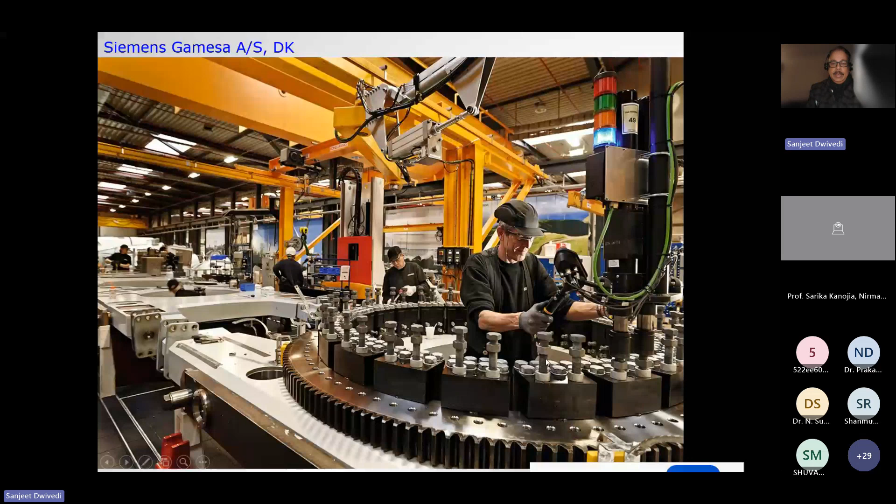So the window of opportunity is closing fast for any meaningful action to limit the planet's increase in temperature and to counter the global climate crisis, and in order to make this planet Earth safe for our grandkids. There is a big alarming issue of climate change.

If we look at the global greenhouse gas emission and predictions for the 30s, 40s, and 50s from the United Nations Environmental Program emission gap report, we find that gigatons of carbon dioxide equivalent in 2030, if current policies continue, the median is 56 gigatons. And if we want to keep the estimated gap to the least cost pathway consistent with limiting global warming, we know there will still be a gap of 16 gigatons.

Still, whatever measures we are taking, we are not able to mitigate fully. But if we set a more stringent target to keep the temperature rise below 1.8 degrees centigrade, the gap is 22 gigatons. And similarly, for the more challenging goal of 1.5 degrees average temperature rise, it's 24 gigaton equivalent.

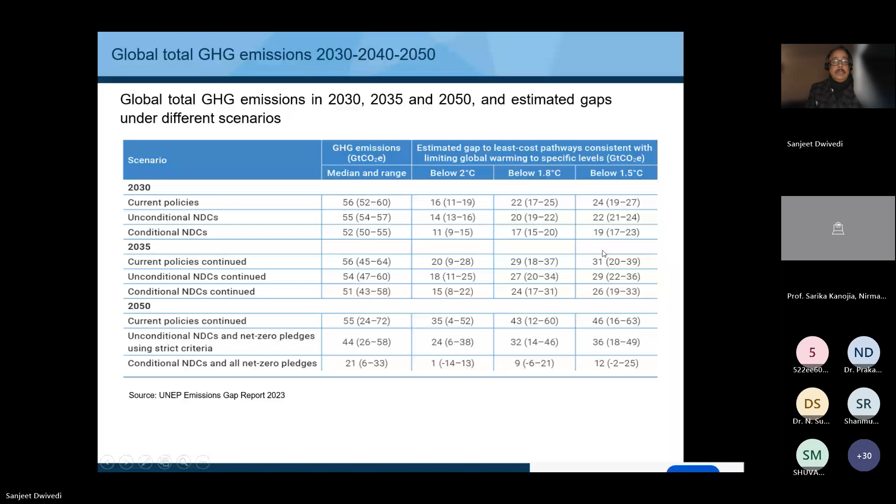But if current policy continues, we see the gap will increase further and further. So we need a coordinated effort in order to reduce this gap.

And in a different perspective, if we see the same graph in a different format for the 1.5 degree centigrade or 2 degree centigrade range with current policies, we see unconditional nationally determined contributors in this scenario. For the conditional nationally determined contributor, we see 11 gigaton equivalent emission. The lower side and higher side is 14 gigaton. And similarly, the median estimate for 1.5 degrees centigrade is 19 to 22.

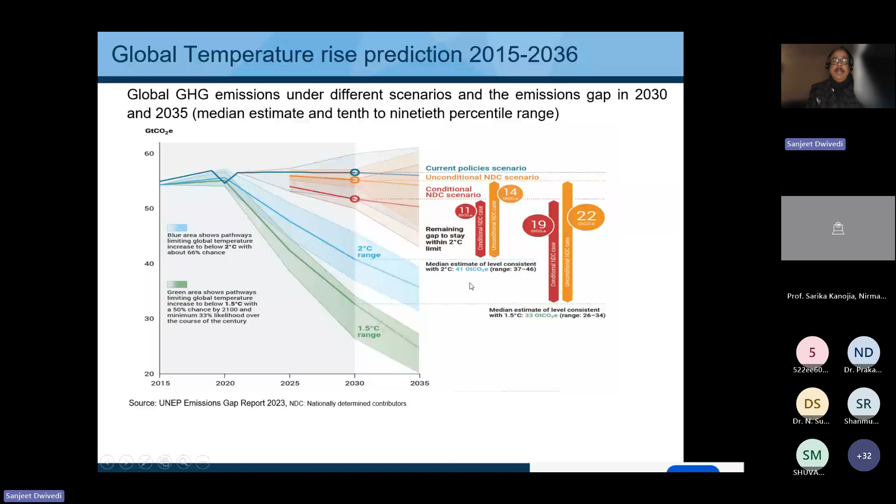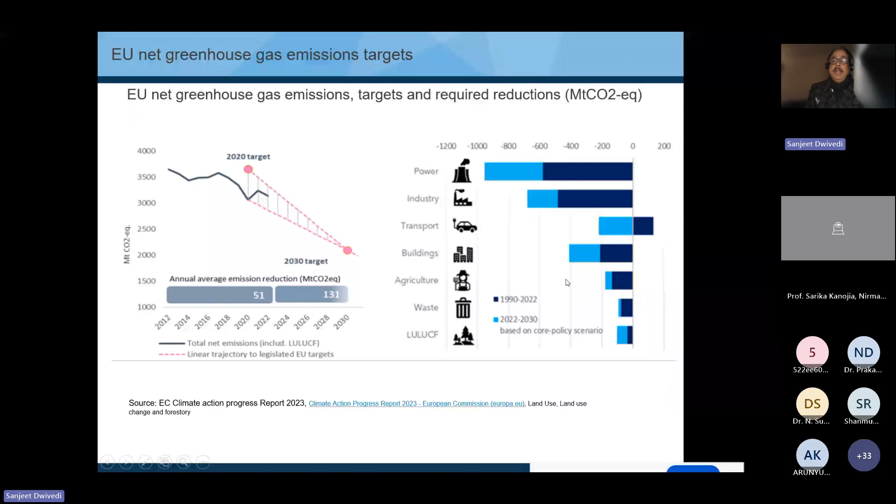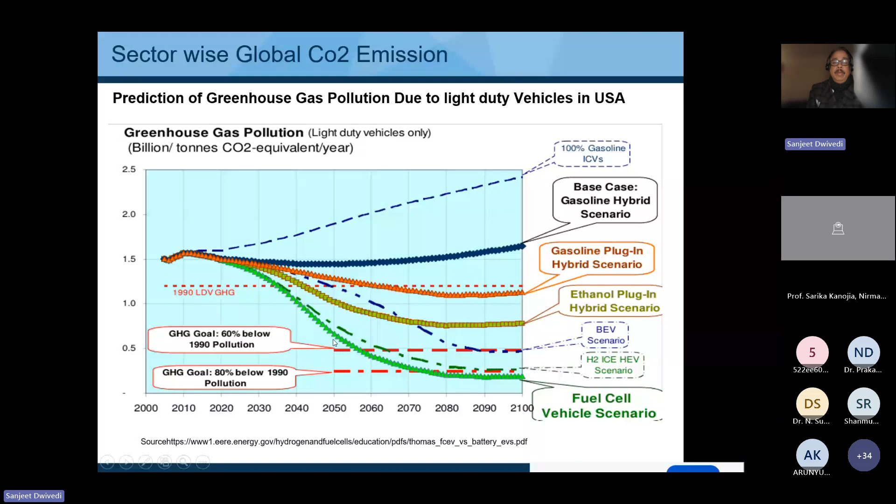But the best scenario is the fuel cell, where we can achieve the greenhouse gas emission goal of 80% below 1990 levels by 2070, and 60% below by 2055. We can reach whatever our targeted goal is by means of it.

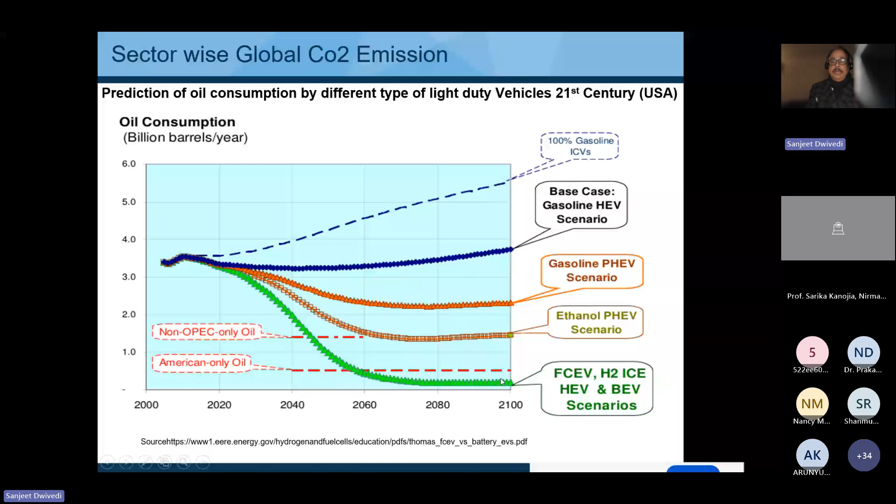So this is the oil consumption prediction. Naturally, if we are not moving towards electrical mobility, oil consumption rises exponentially. But as soon as we go for the fuel cell electrical vehicle, hybrid electrical vehicle, or plug-in hybrid electrical vehicle, this is going to reduce.

So why green technologies, and why do we need to look into it for e-mobility green technology? As you know, in 2015, due to the Paris Agreement, nations around the world gathered and agreed that rapid decarbonization is needed to prevent the dangerous impact of climate change. Subsequently in 2018, the Intergovernmental Panel on Climate Change (IPCC) report said global warming of 1.5 degrees centigrade shows the need to cut greenhouse gas emissions.

And it is even more urgent than previously thought. Recently, in 2023, a public-private action statement was launched at COP28: we will foster the technological and infrastructural solutions necessary to supply the world with sustainable, safe, stable, and affordable hydrogen energy. The world already knows that if we want to solve this greenhouse gas emission problem, we need to move to hydrogen as an energy element and a sole source of energy.

As I stated earlier, the window of opportunity is closing fast for any meaningful action to limit the planet's temperature increase and counter the global climate crisis. Policymakers have already increased their effort to reduce emissions in all economic activities. Options that would deliver only partial emission reduction are not sufficient and cannot be accepted.

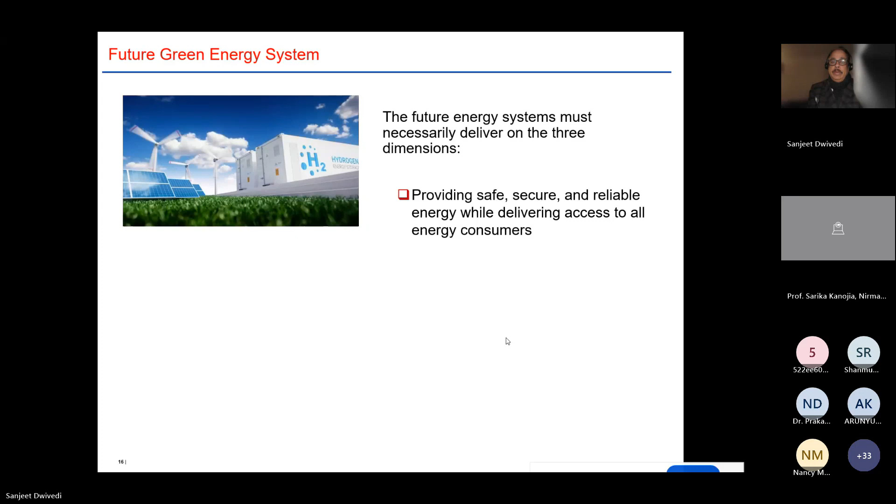Supply energy at affordable price.

Can you hear me? Can you hear me? Yes sir, we are audible to you. Yes, because my computer got disconnected. Just a minute. Okay, never mind, it means PC is connected, so I will go like this.

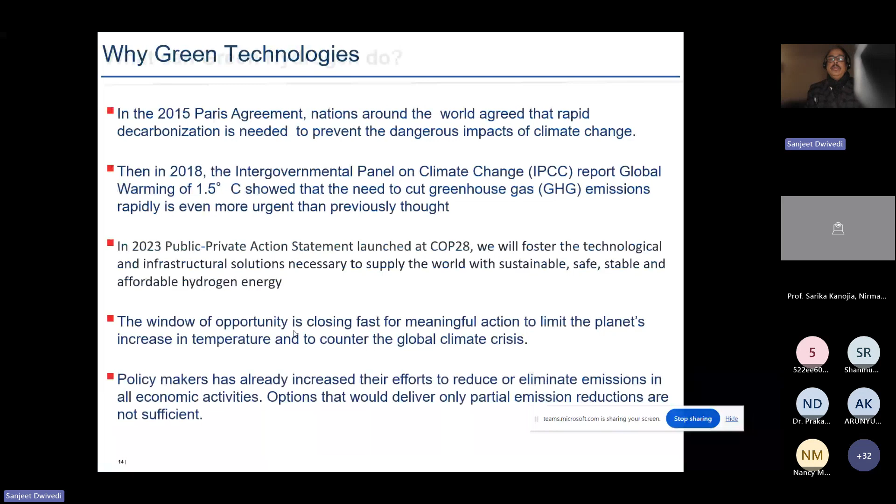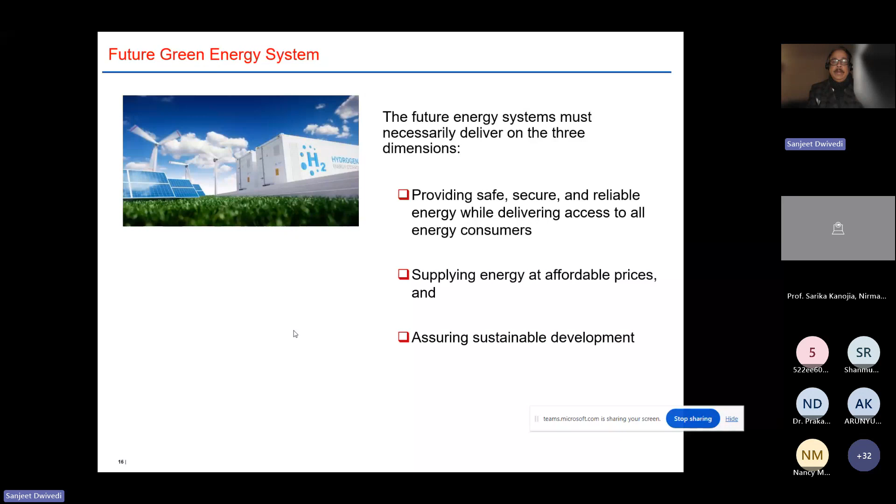So this first dimension is safe, secure, and reliable energy. The second dimension is supply energy at affordable prices, and the third one is assuring sustainable development. So these are the three rudiments.

And this future green energy system will involve massive changes at the technical and organizational level, together with tremendous technological upgrades in different sectors, ranging from energy generation and transmission systems down to the distribution system. These actions constitute huge science and engineering challenges and demand expert knowledge in the field to create solutions for a sustainable energy system.

And this must be economically, environmentally, and socially viable while meeting high security requirements. So we can see that people from the academic world and industry are facing larger challenges in order to meet these goals and to contribute to a future clean energy system.

Then the question comes: what is the secure green energy source for the next generation? If we look at some numbers, these numbers are in terawatt year per year, kilowatt hour, so hour to days, days to month, month to year, and kilowatt to megawatt to gigawatt to terawatt.

If we see the annual world energy consumption in 2009, it was 16 terawatt year per year, and it will increase by 75%. In 2050, it's expected it will go to 28 terawatt year per year.

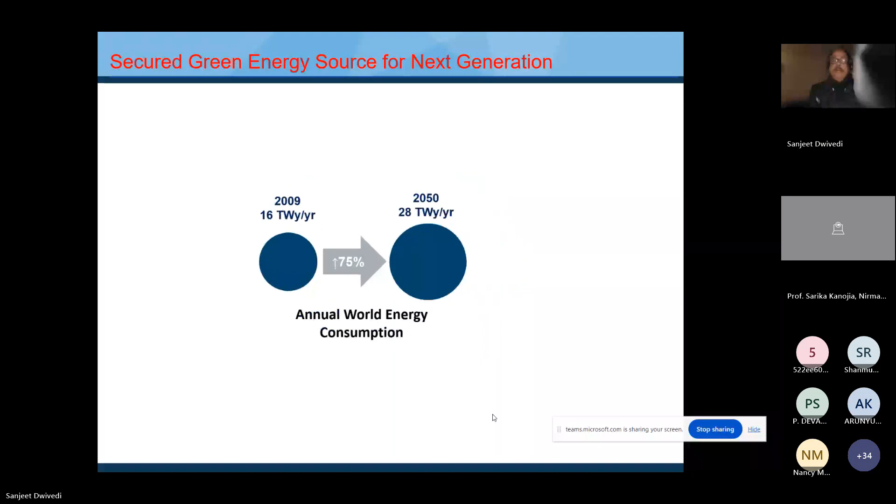How can we achieve it? With total terawatt year, we are having coal 900, so that can sustain only for 30 years or so. Uranium 90 to 300, so maybe 3 to 10 years. Similarly natural gas 215 terawatt year, oil 240. So everything, we cannot sustain beyond 2060 or 2070.

So what is the source? Hydro can only meet partial requirement, 3 to 4 terawatt year. Similarly wind is 25 to 70 terawatt year per year, so this can be a potential candidate. The whole world can be fed with wind, but it has technological challenges because we are limited by the availability of wind, and this technology single unit is still up to 15 megawatt. So we cannot make a big single unit plant, we need to use a wind park, and that has its own challenges.

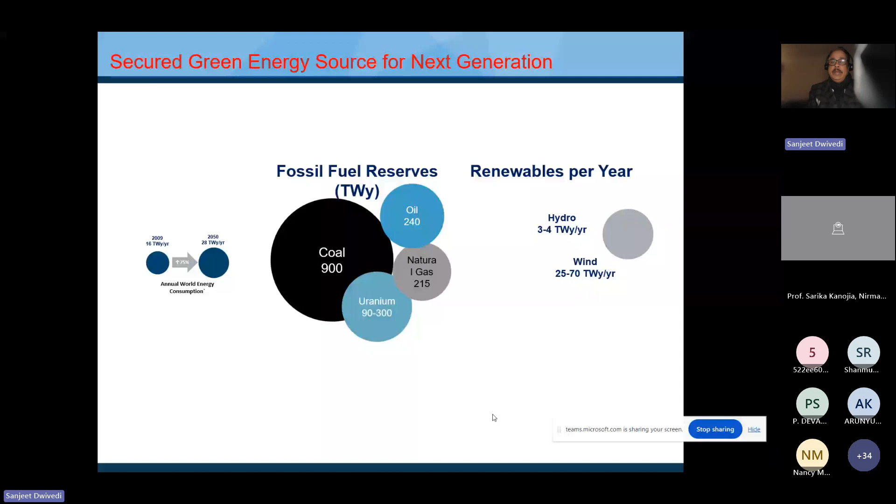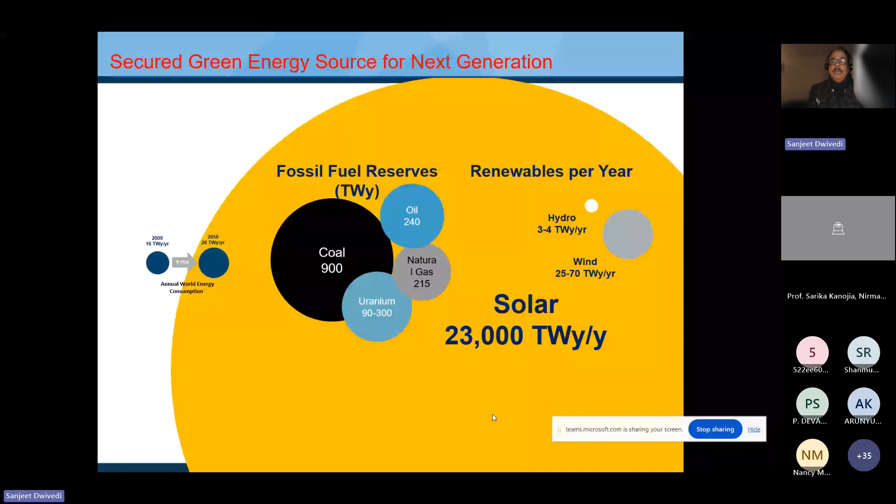But solar energy has 23,000 terawatt year per year. If you look at it on the perspective of a bubble, on the scale of whatever the energy need is in terawatt year, this bubble is also equivalent to that. So we see that solar is sufficient to feed us for many centuries.

And the good thing is the price per watt of solar PV is reducing drastically. It's reduced 15-fold in the last 15 years. It is 0.5 US dollar per watt, so that's cheaper than the installation cost for a coal plant.

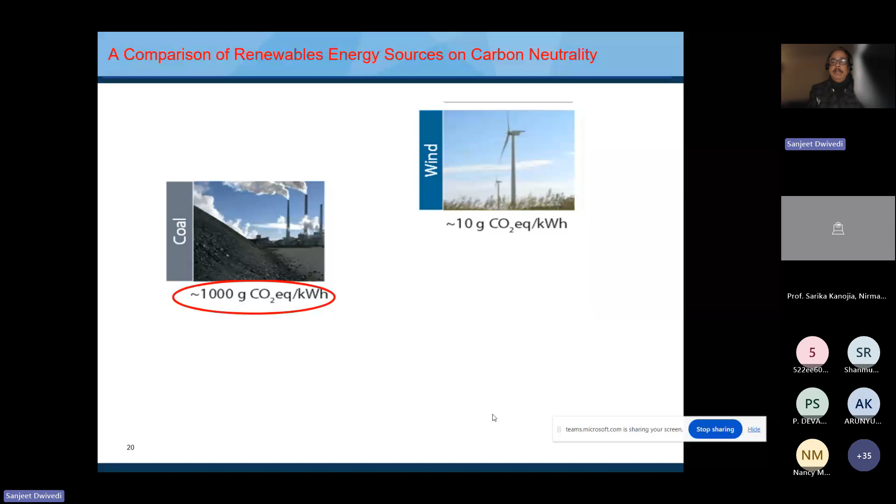If we see carbon neutrality, coal has per kilowatt hour 1 kg carbon dioxide, wind has 10 gram carbon dioxide per kilowatt hour, and photovoltaic has 40 gram. So solar has a little more carbon footprint compared to wind, because of the solar panel production and other things involving carbon. But compared to coal, they are 100 times, even 25 times lower.

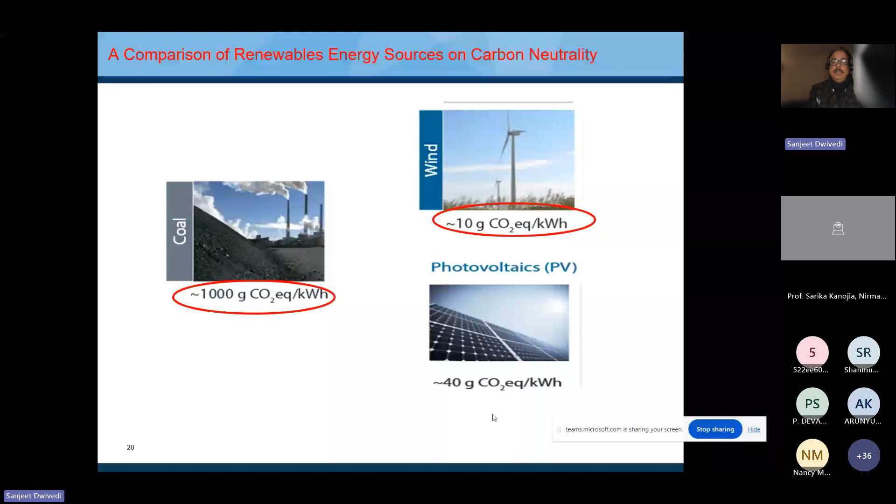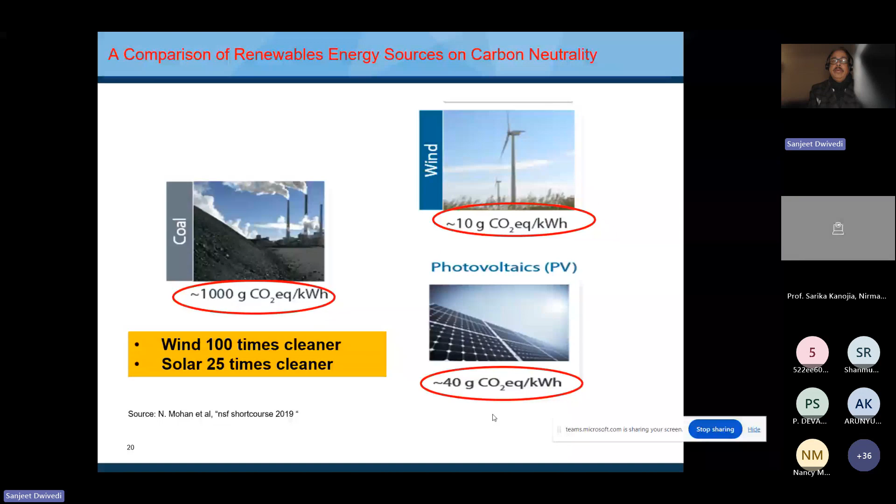So what are the recent trends in wind energy systems? This is the fastest growing source of new electric generation in the world, and it is expected to remain so. At the end of 2010, the installed wind capacity stood at 200 gigawatt, but by the end of 2023 it will be 900 gigawatt. You see that within 13 years it goes up 4.5 times.

The world is observing a growth rate of more than 10% each year, and today 7.33% of world electricity comes from wind power. India is also rapidly growing in wind energy production.

Our indigenous technology from Suzlon has a 3 megawatt single unit, and they are working on higher power size units. The proportion between solar and wind is not equivalent, but efforts are going on to increase the percentage of wind energy in India too. As you see in the recent budget, the finance minister earmarked a huge amount of money for offshore wind plants, because that is the future.

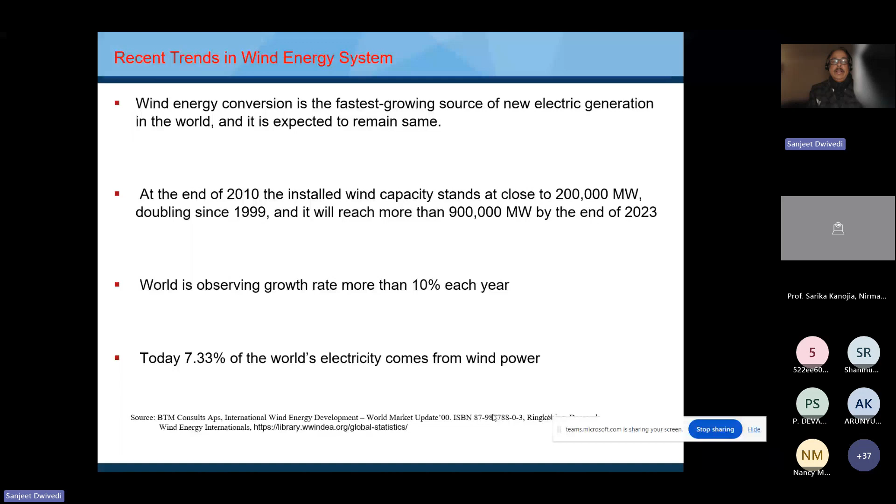The beauty of offshore is you need not use the land. Whatever the disadvantages of wind energy production are, those are not associated with offshore. There is no noise, no pollution, no land misuse. On the other hand, availability of wind is highest offshore. And we already have existing infrastructure from offshore gas and oil rigs for carrying this out, so these technologies are quite mature already.

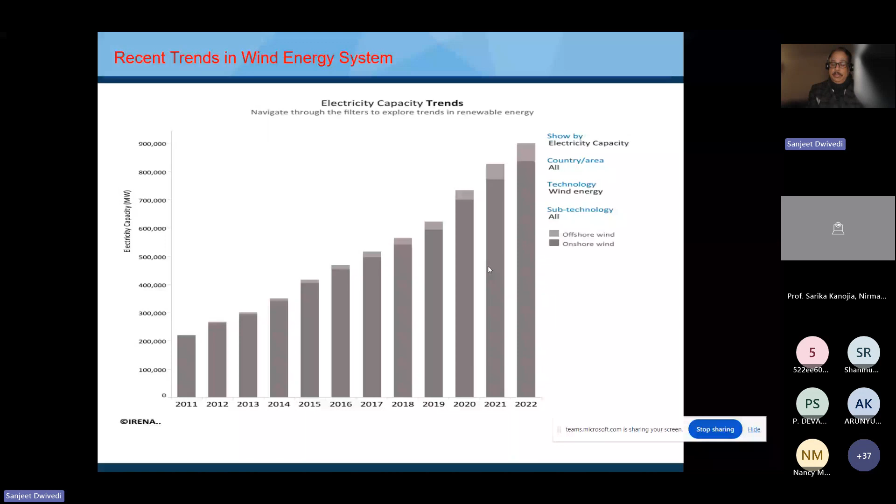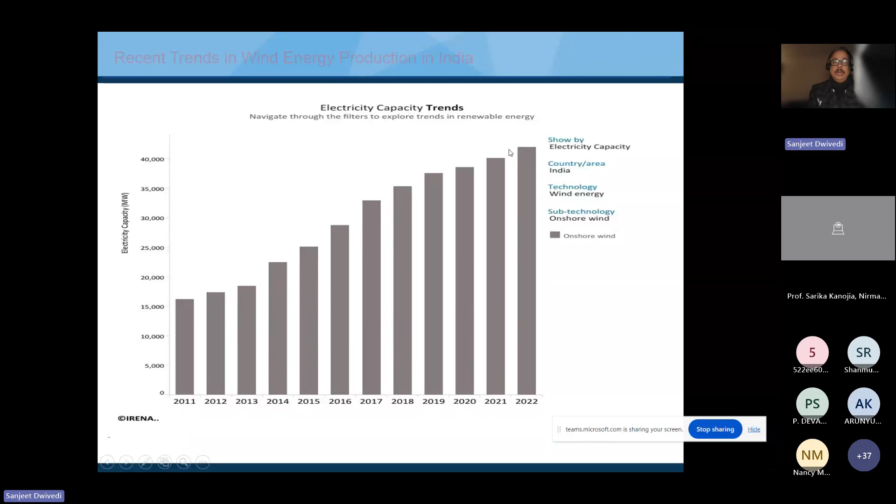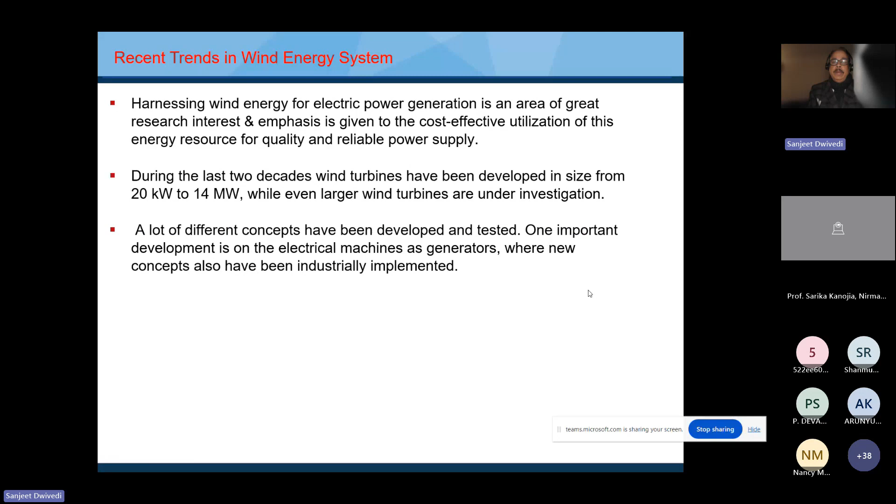So these are the recent trends in wind energy, harnessing wind energy for electrical power generation, an area of great research interest. During the last two decades, the single unit wind turbine size increased from 20 kilowatt to 14 megawatt, and even higher wind turbine size is under investigation and technological development. A lot of different concepts have been developed and tested. One important development is on electrical machines and generators, where new concepts are also being industrially implemented.

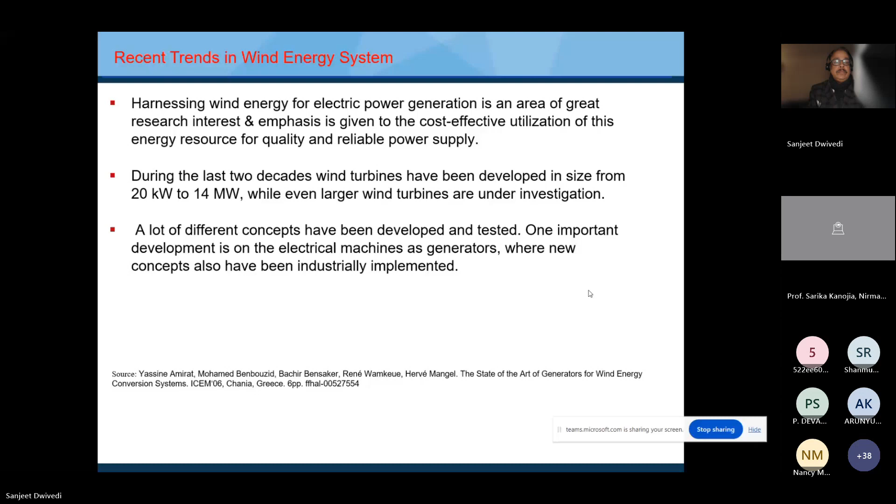An important issue for wind turbine is efficiency. Efficiency is important when comparing different systems, because losses reduce the average power produced by the wind energy converter, and therefore they reduce incomes. I can give you an example for a 15 megawatt single unit wind turbine.

The total losses comprised of generator losses, converter losses, and auxiliary system losses account for around 8%, and this is around 1.2 megawatt out of this. So that is a huge loss, 1.2 megawatt of energy.

So there is a big potential for research. How can we do the sector coupling? How can we harness this energy loss, this excess heat? Otherwise, we need to do the cooling, and then we need to use extra electricity for the turbine. Although it is 15 megawatt, the output is reduced.

So for researchers, it will be a big research question, and there will be a lot of new innovation. For example, seawater can be used for cooling this wind turbine, and then carrying this heat in water molecules and using it for district heating or some industrial use. We may also use this heat to energize the solid oxide electrolyzer, which works on heat and electricity both, so we can increase the efficiency of electrolyzers. There are many ideas, but we see that the world trend is towards making efficient wind turbines and converter systems.

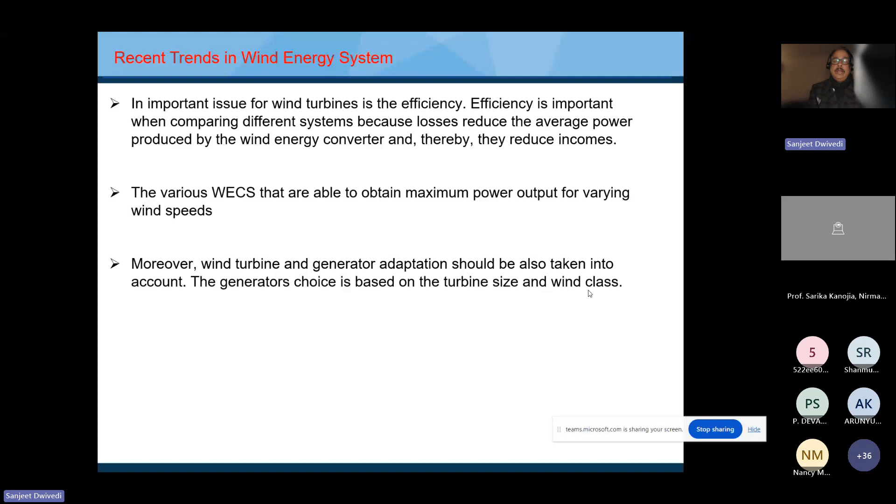Also, obtaining maximum power output for varying wind speed - the technological focus will be on that. And wind turbine and generator adaptation should also be taken into account. The generator choice is based on turbine size and wind class.

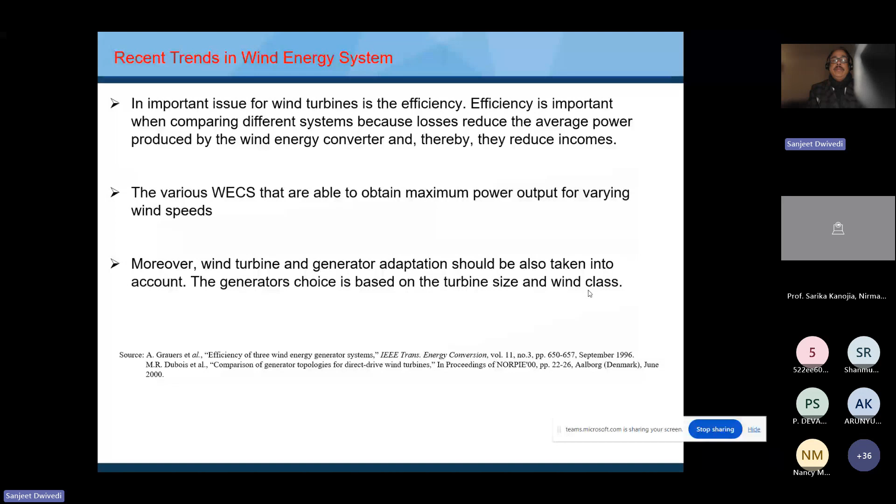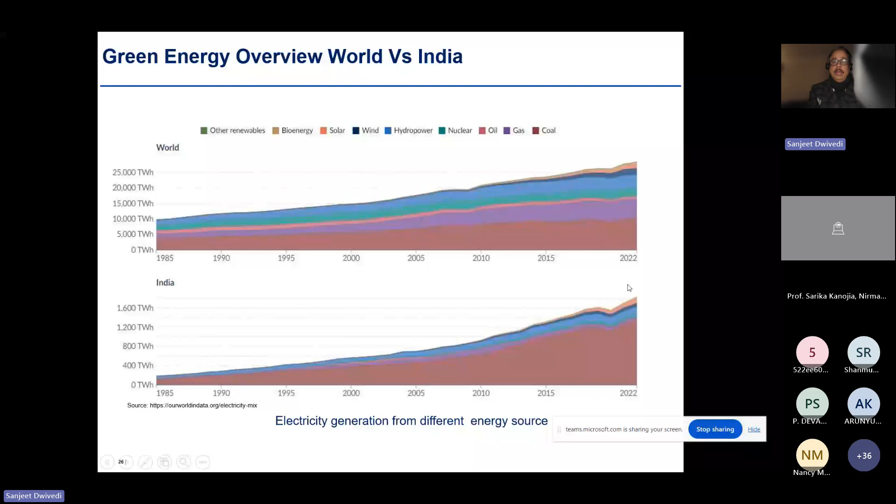This is a green energy overview, world versus India. The top graph and the bottom graph show how different energy source types contribute and how they grow worldwide, and in the bottom, we see India's growth, which follows the same pattern. The top pink is solar. So we see that whatever percentage the world is growing, India is also growing in a different graph, percentage wise. We see that as our economy grows and our industrial revolution continues, we are rapidly increasing our manufacturing plants.

That demand is on the coal and gas fired stations, so they increase a little bit, but we see a significant increase in solar plants. In the last 7, 8, 10 years, we are following the world trend, or even doing better than the world trend.

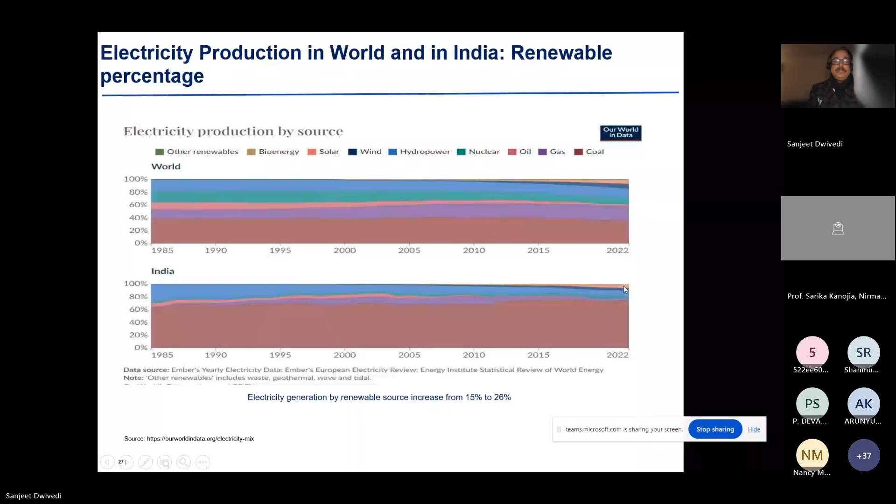So why green hydrogen? When we talk about achieving zero greenhouse, reducing greenhouse gas emissions, it was predictable in the past that green hydrogen should receive a new wave of attention from government, policymakers, energy sector stakeholders, and even the general public. And it is true now.

You name the country, they are having a specific green hydrogen policy, and we are fortunate - in India, our Prime Minister made this green hydrogen policy around 4 years back during Corona time, and we are leading in some parts. A lot of startups have started, and I was reading somewhere that India will bring 21 hydrogen trains by next year. Indian Railway will adopt 21 hydrogen trains, and we already heard about hydrogen cars. We already see there is a bid for government subsidy for electrolyzer plants, with more than 2,000 crore rupees subsidy, and there are big players coming to produce hydrogen in India, specifically green hydrogen.

An unprecedented number of reports, news articles, webinars, and events in the last 2 years have touched upon this topic.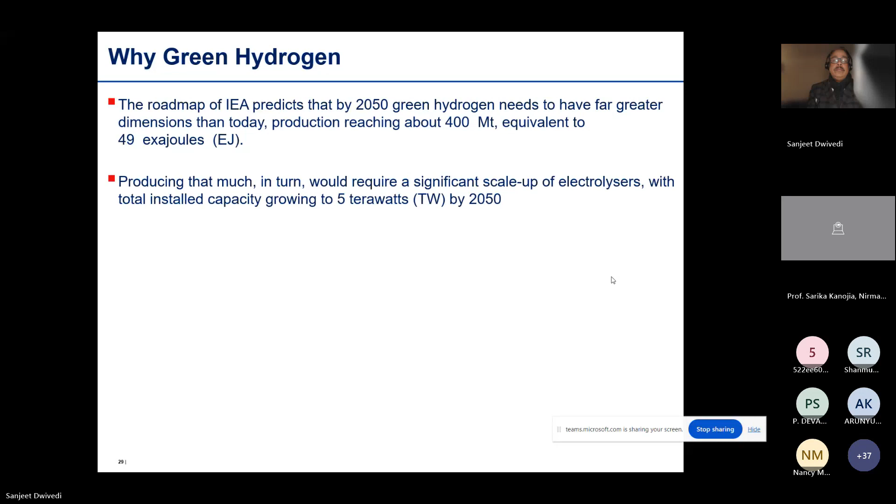There are certain other rationales for why green hydrogen matters. The International Energy Agency predicts that by 2050 there will be a much larger dimension than today for use of green hydrogen. 400 megatons of hydrogen will be required, needing 5 terawatts of energy, and electricity demand to produce hydrogen reaches close to 21,000 terawatt hours per year.

Achieving these ambitious numbers will be a major challenge, but this challenge can be met through a wide range of policies and networks. After the geopolitical issues and the pandemic, green hydrogen has already received a new wave of attention, and the EU, US, India, and China are all in action.

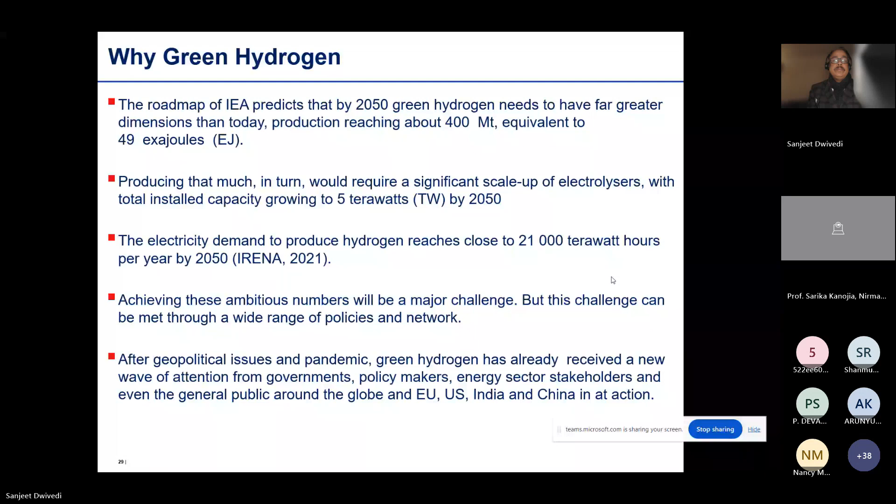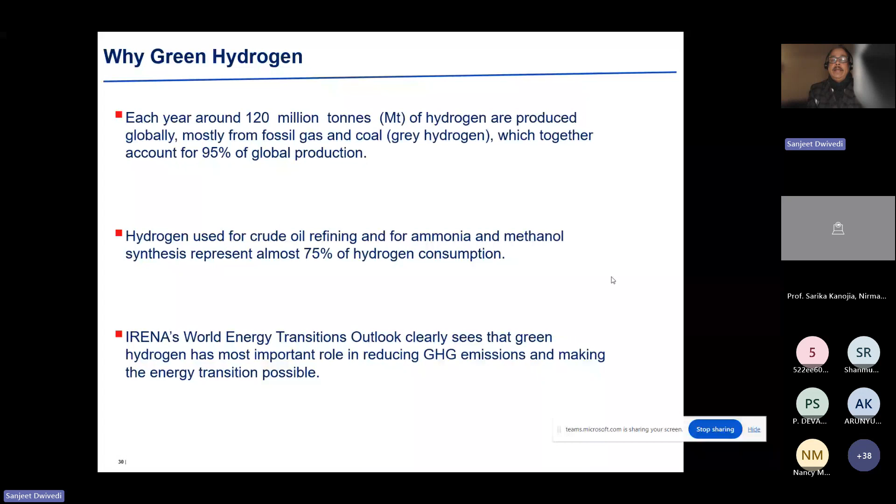The World Energy Transitions Outlook clearly sees green hydrogen having the most important role. Given this conclusion, in order to understand green hydrogen as a measure for global greenhouse gas emission reduction, we need to look at how hydrogen can act as an energy storage element, and what its properties are.

As we know, hydrogen is the world's lightest and tiniest molecule, having only one electron. Its melting point is 13.81 Kelvin and boiling point is 20.28 Kelvin, very close to absolute zero, around minus 252 degrees centigrade. Its density is 0.0898 gram per liter.

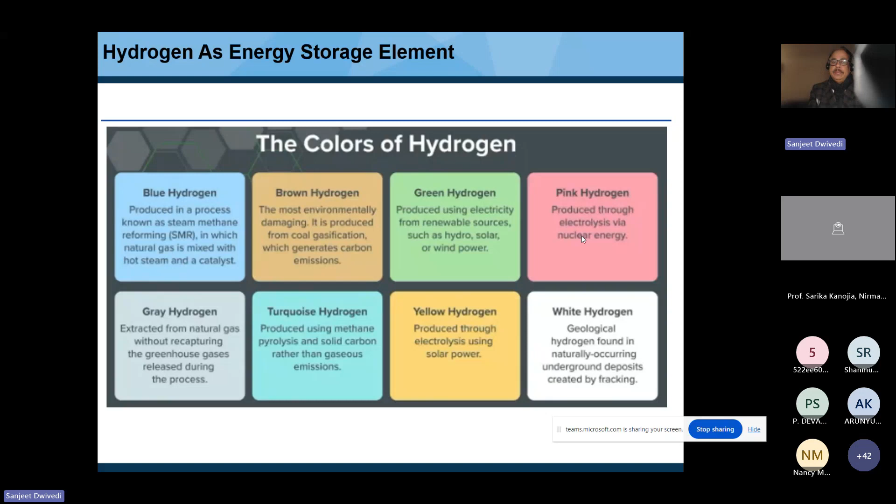Please note that although this hydrogen is called pink, when we say green hydrogen, this also falls in the broad category of green hydrogen, because nuclear is also considered in that category.

So here are some interesting numbers. Energy density: hydrogen is 141.8 megajoules per kg, and liquid and gas forms have the same value because it's on a weight basis, not considering volume. This is almost three times more than methane and gasoline/petrol.

But in megajoules per liter, it is about 3.5 times lower than gasoline. So gravimetric energy density is higher, but volumetric energy density is lower, and specific gravity is low - it's 0.071, about 10 times lower than petrol or gasoline.

Melting point and boiling point, as I mentioned, are around minus 252.8 degrees. Carbon dioxide emission is 0, because when you burn hydrogen it produces water with no carbon dioxide. But in grams per megajoule, we see 148 with gasoline and 111 with methane. Flash point is not applicable for hydrogen, but gasoline/petrol has a flash point of 13.3 degrees centigrade, which makes hydrogen safer from that point of view.

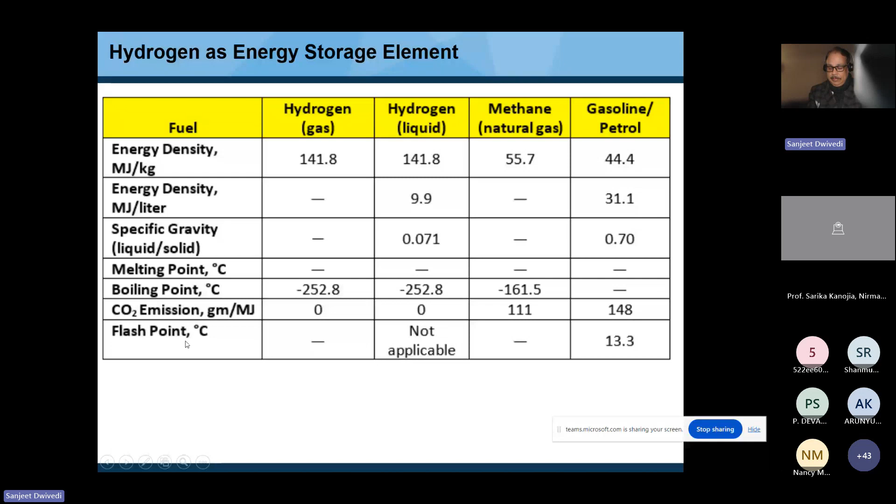So on a weight basis, hydrogen has a high energy density, around 3 times that of gasoline. But on a volume basis, it has only 1/3 the energy density. So overall, comparing 1-to-1, we can say it is equivalent to, or not too bad compared to, gasoline.

Liquefied hydrogen is currently used in special applications like the space industry and space missions, where issues with thermodynamical efficiency are not critical. For space, if we use extra energy to liquefy hydrogen, the energy density further reduces, but this is not an issue for the space industry because it's not a bottleneck, and it's a few penny in the whole project's liquefaction cost and energy reduction. But if we talk about mass use of liquid hydrogen, this is one of the bottlenecks. The energy used to liquefy hydrogen and maintain its liquefied state involves a lot of energy, and that reduces further energy efficiency of hydrogen as a fuel. So this is somehow not encouraged.

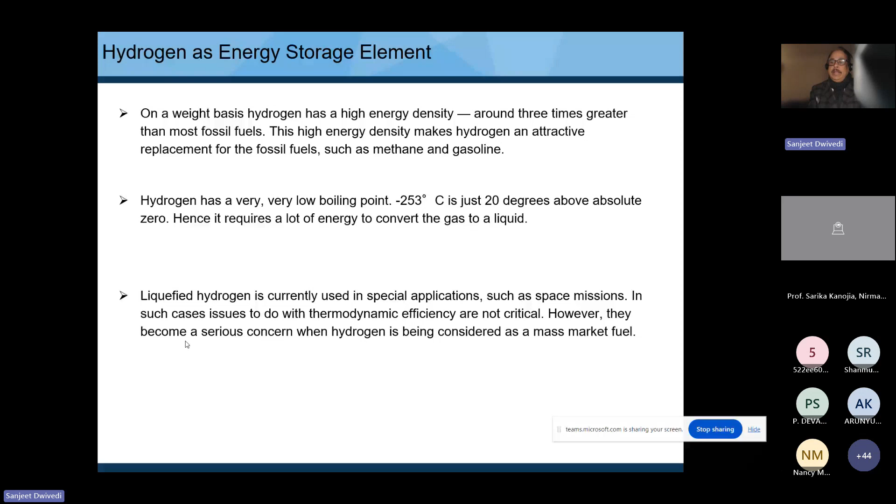The volumetric density of gaseous hydrogen at atmospheric pressure is 0.09 kg per meter cube. So in a 1 meter cube tank, we can keep 0.09 kg hydrogen, and it's not viable or practical to make a huge storage for that. So we increase the pressure. Normal practice is 350 bar and 700 bar pressure. Heavy duty vehicles use 700 bar, light vehicles 350 bar, and vice versa is also possible. There, the volumetric density of compressed hydrogen is increased 10 to 15 fold.

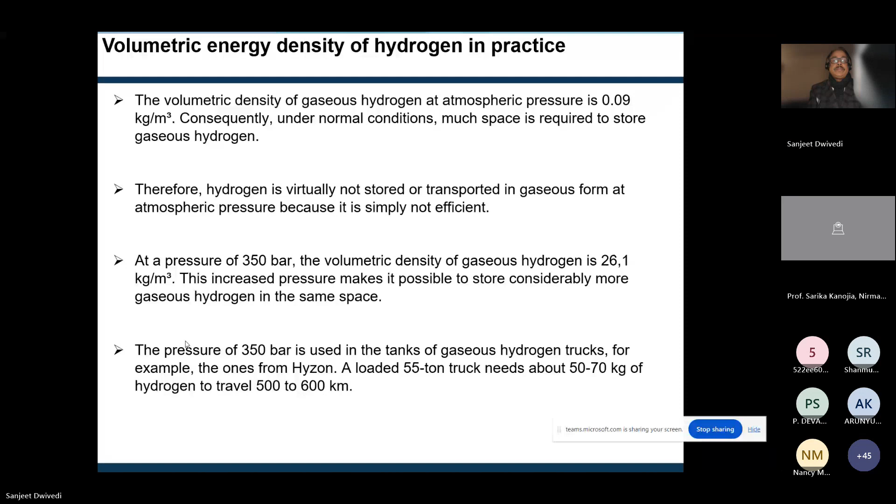At 350 bar, it is 26.1 kg per meter cube. So 1 meter cube stores 26 kg hydrogen at 350 bar, and it is enough for 500 to 600 kilometer range. And at a pressure of 700 bar, it is 42 kg per meter cube. Please note that it is not linear, but it is increased.

With the Hyundai Nexo, a 125 liter tank contains 5 kg of hydrogen, and it is a product already available in the market, and it can drive 600 kilometers.

So liquid hydrogen is a strong candidate as an energy carrier for sustainable trucks and aircraft, which are currently under development. Because for sustainable trucks or heavy duty trucks, we need more energy density and long range, and that is not possible even with compressed hydrogen.

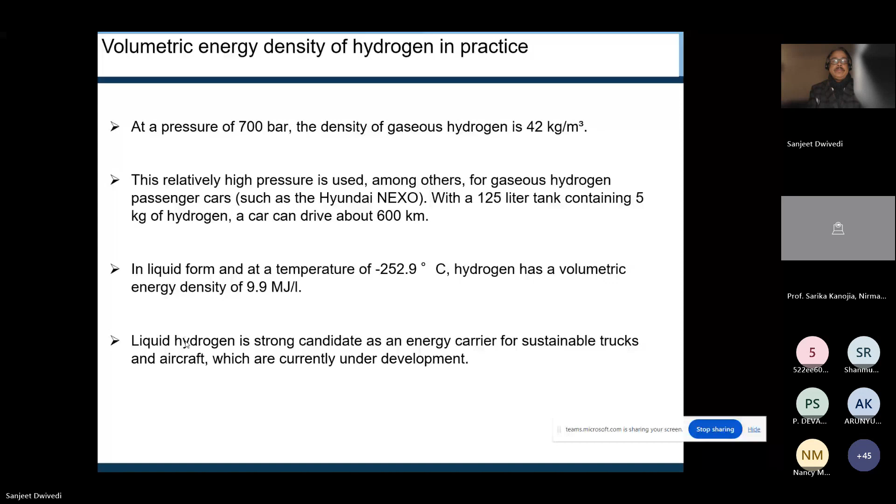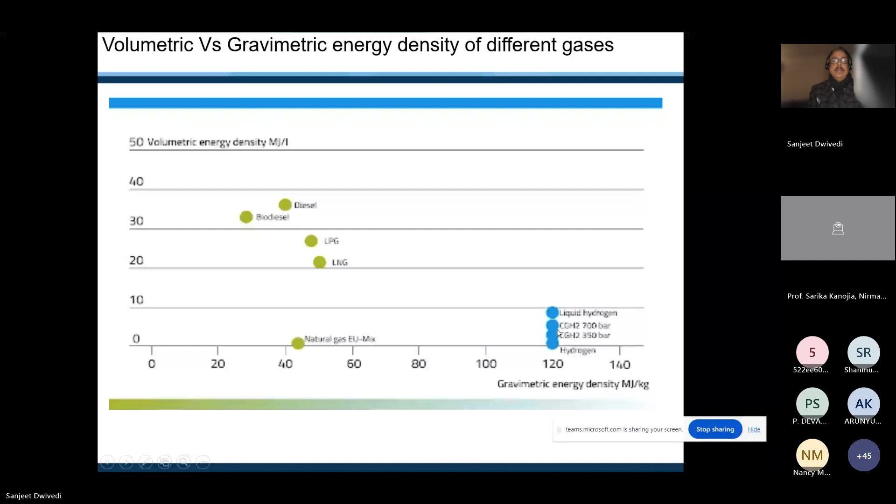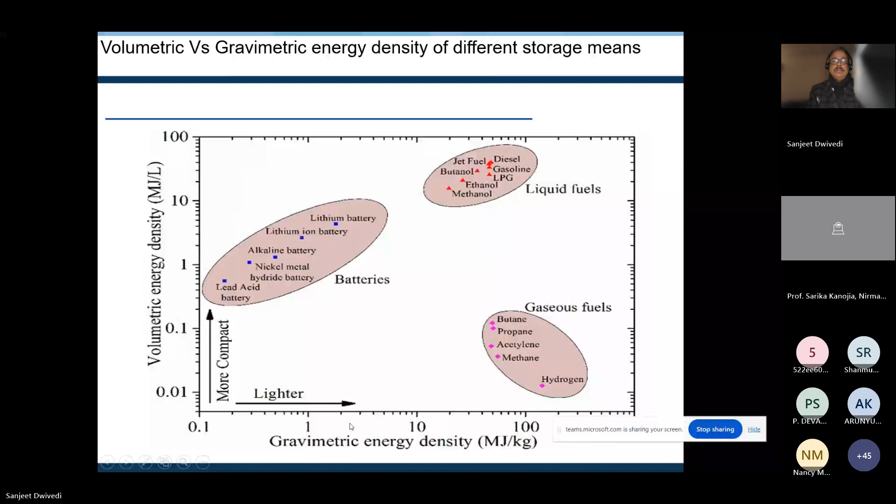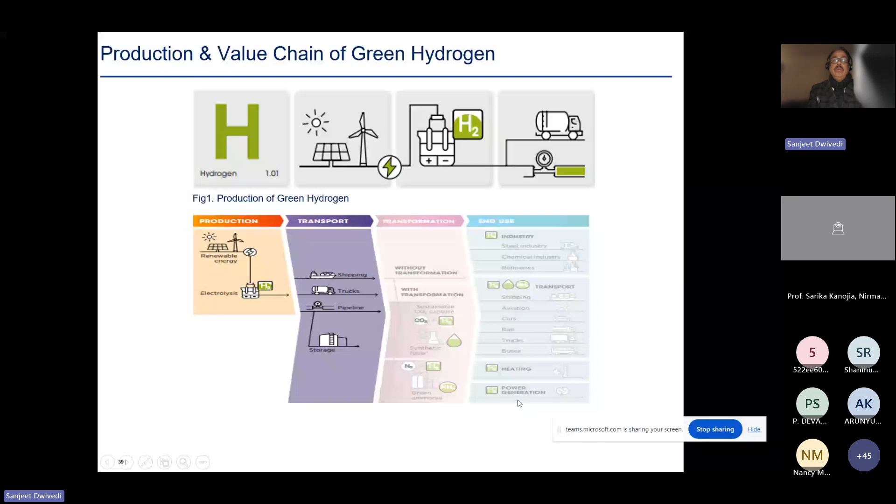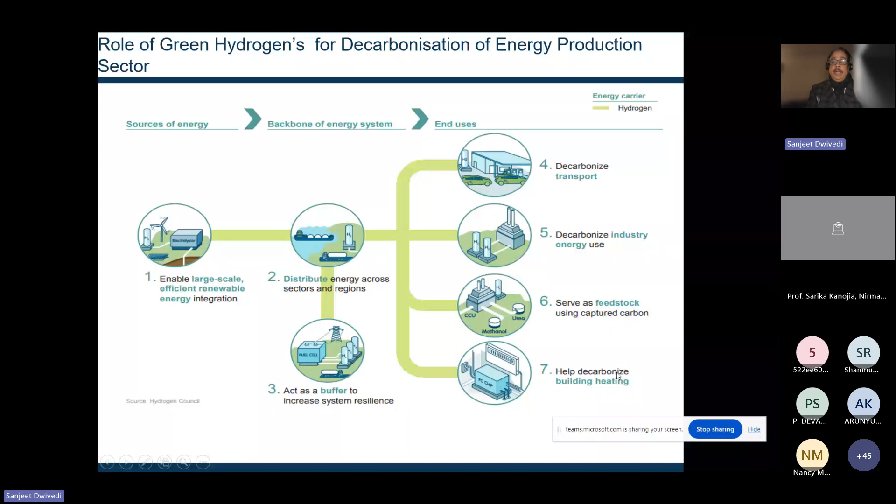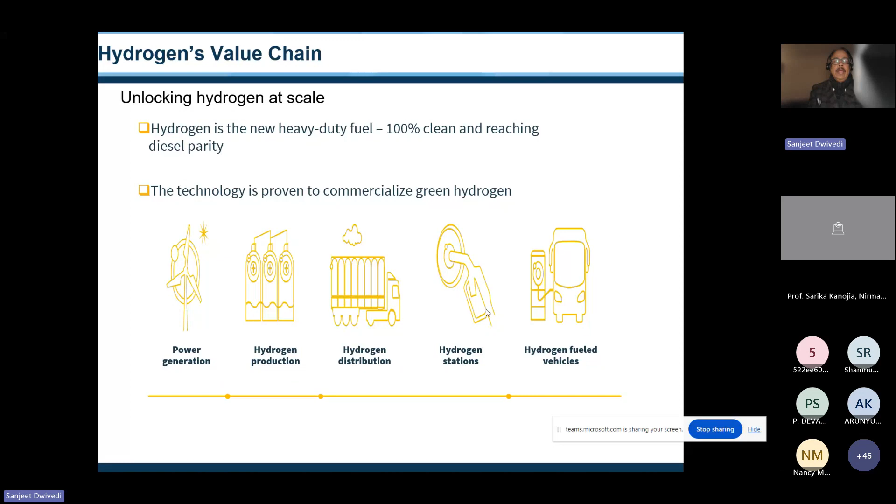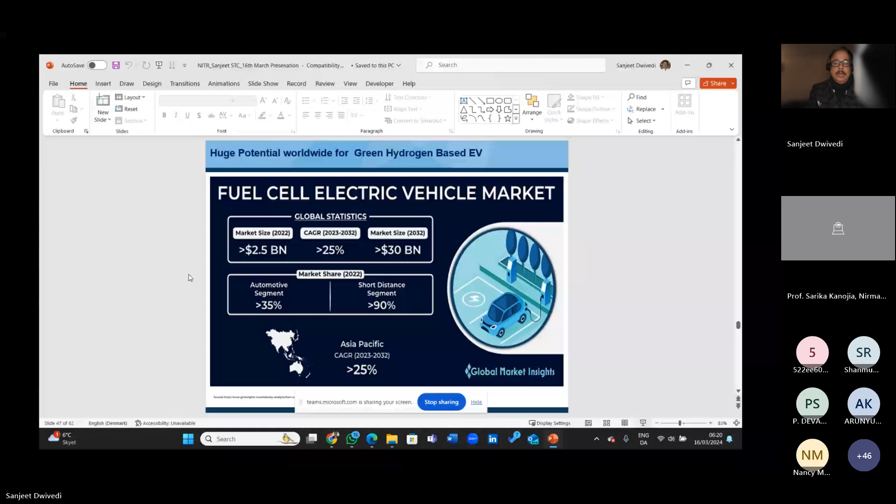This is another perspective, and time is going very fast, so I will not go here. I will directly go to the comparison slide where I can give you new insight on why we need hydrogen. So if we are talking about battery energy vehicles and we are talking about fuel cell electrical vehicles...

Battery electrical vehicle, they are reality. We see that a lot of BEVs are produced in India. There are many players, they are making it, and it's growing penetration in use.

But for fuel cell electrical vehicles, there is a prediction from global statistics, global market insight, that its market will rise with a compound annual growth rate of 25%, and it is a more than $30 billion market by 2032. Please note that this short distance segment, this automotive segment, car segment, that might be only one third, 35%.

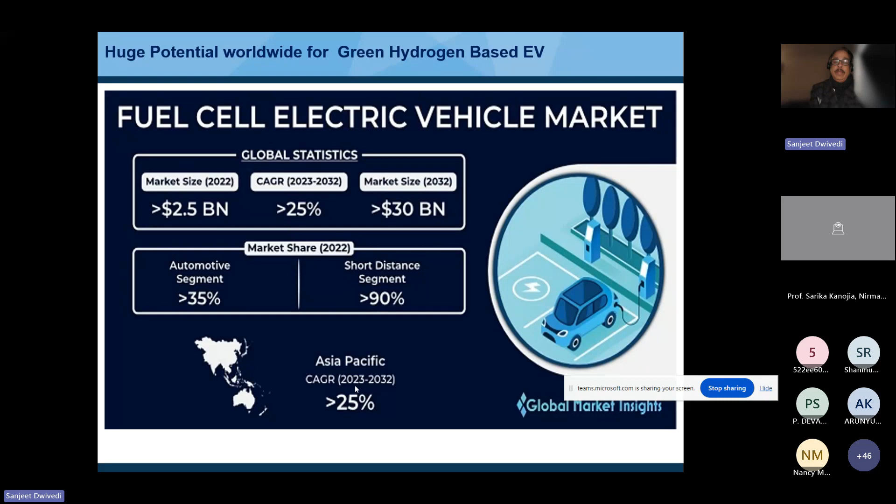But the short distance segment, like fork truck or forklift or agriculture equipment and off-road vehicles and this type of applications, they will be dominated by the hydrogen fuel cell vehicle, more than 90%. And Asia Pacific is also having it. Although it's a US report, they predicted for the Asia Pacific region the same compound annual growth.

Very superficially, if you look on battery electrical vehicle and fuel cell electrical vehicle, then charging/refueling time is compared - many hours to few minutes for FCEV. That's a major advantage. The user will not have a cultural shock or change in his daily practice. He will have the same experience like what he's having today.

On safety, there were some comparisons: in case of fault, in case of leakage, in case of fire, hydrogen, because of being the lightest element, disappears quite fast, and compared to battery fire hazard, it is less dangerous. Cost-wise, there are technological challenges in order to have a sustainable supply chain from production to distribution. So it's more costly now, but in future it will reduce.

Then well to wheel emission - it is the lowest for FCEV, because when we talk about battery electrical vehicle, we cannot guarantee it is green energy. It is e-mobility - we are not doing pollution, but in order to charge that battery, we use the national grid, and the national grid, as I showed you in an earlier graph, is still having more than 70% energy coming from conventional sources. So that is not clean. These gas plants and coal plants have marginal efficiency of 20%, 25% or less. So we are not green there.

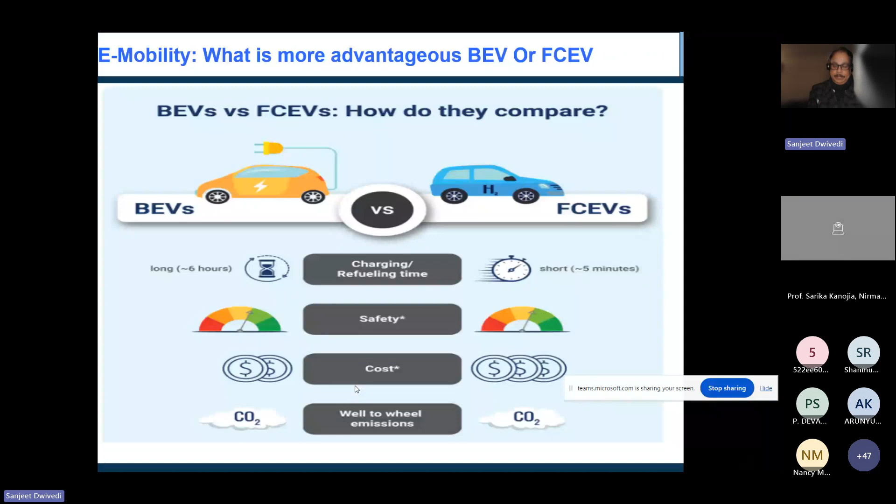This is a specific energy comparison, as I showed you in the graph - volumetric, gravimetric comparison. You see lead acid, nickel metal hydride, lithium ion, and in the United States, this battery consortium developed some new types of batteries. You see the watt hour per kg for 5000 psi, meaning 350 bar, and this one is 700 bar pressure, and it's quite high compared to battery.

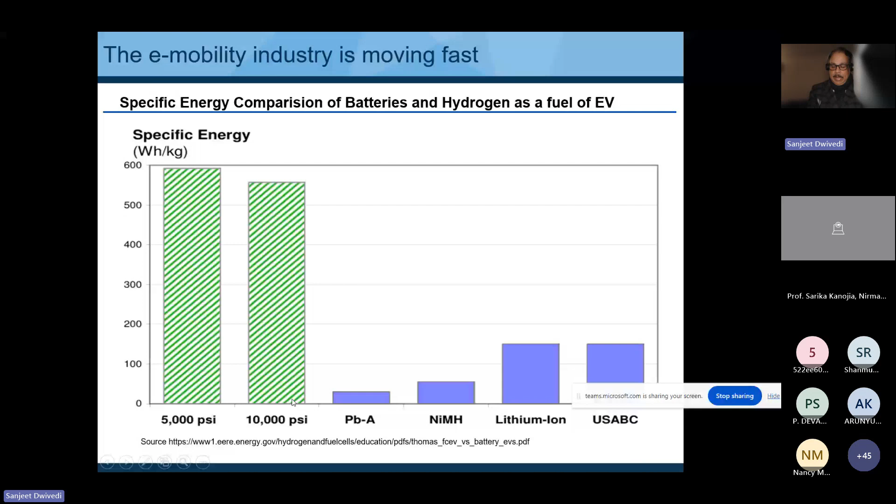Same if you look on weight of battery electrical vehicle and fuel cell electrical vehicle, it is per range. If you increase mile range to 400, you see that hydrogen fuel cell is not increasing weight, but there is an exponential rise for batteries. Any type of battery you use, some are non-viable - you cannot use lead acid or nickel metal hydride, but lithium ion can be used. But compared to hydrogen, it is 3 times, 4 times more weight consuming.

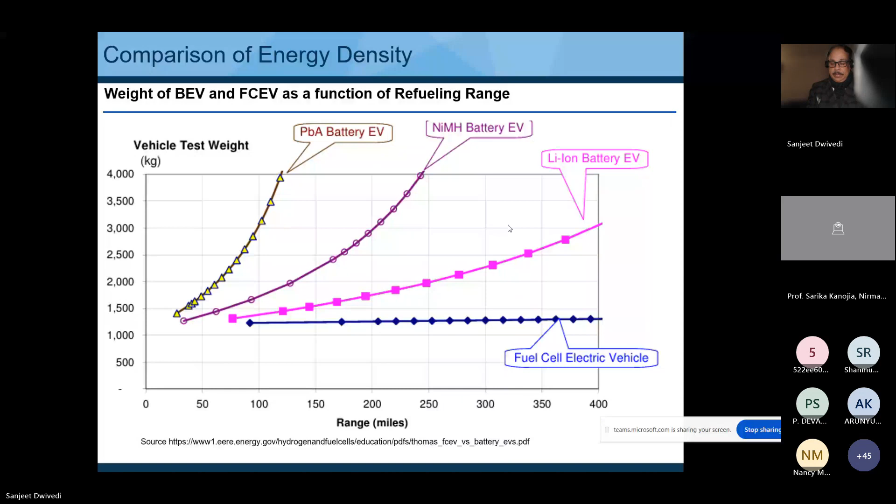This is energy density of hydrogen based fuel cell electrical vehicle and battery system for BEV, in watt hour per liter. Again we see that hydrogen surpasses it and is having a better perspective.

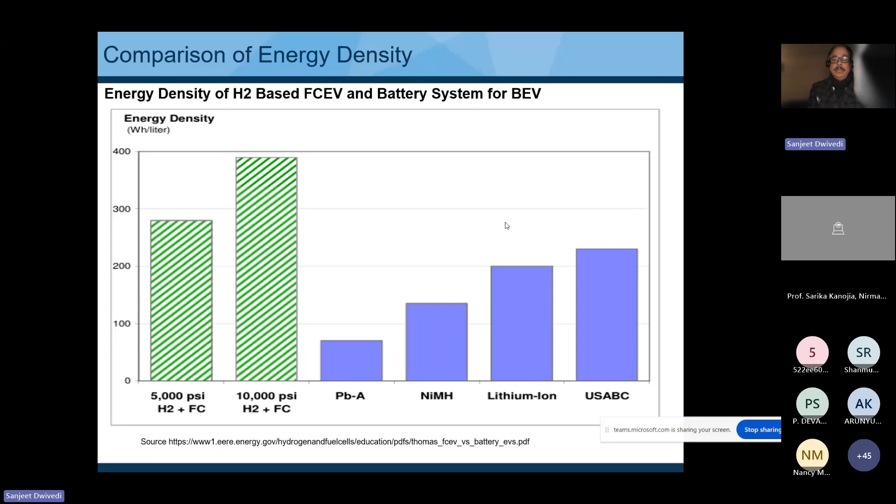This is volume of hydrogen storage and battery systems, how much volume is involved - energy storage system volume. Again we see fuel cell hydrogen tank and the Department of Energy storage goal. This report is taken from the US Energy Department, and you see this is the goal, but we have these dotted curves for 700 bar pressure, and it is a huge saving compared to battery electric vehicle.

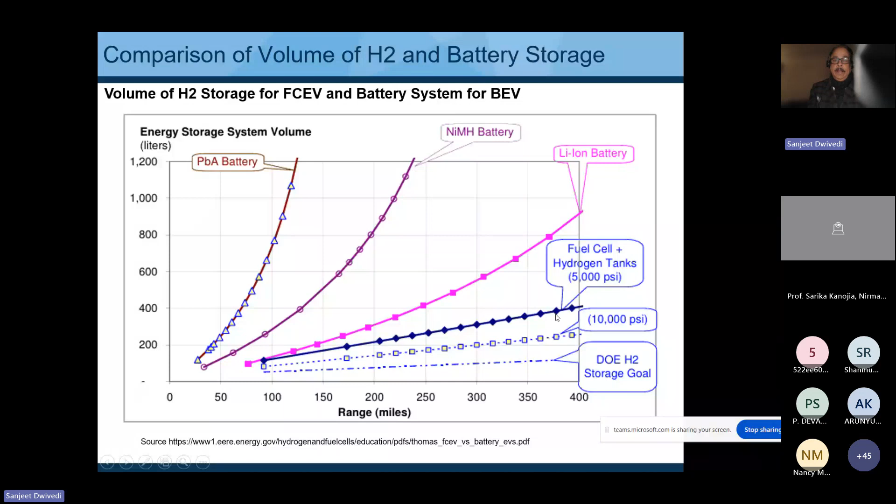This is another way to look into specific energy versus specific power. Specific energy means range, and specific power means acceleration. So we need a bigger kilowatt motor and a bigger kilowatt hour capacity. Looking at fuel cells, they lie in a good position compared to lithium ion battery.

They are good in watt hour per kg, but not in specific power comparison. The BEV goal is we need 150 watt hour per kg and 300 watt per kg power. Compared to this, we see that fuel cell surpasses again this need for specific range and acceleration requirement of e-mobility.

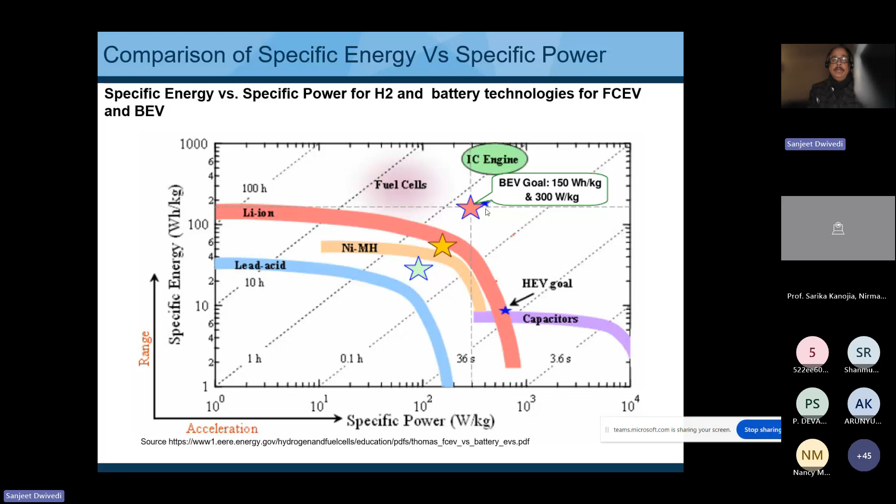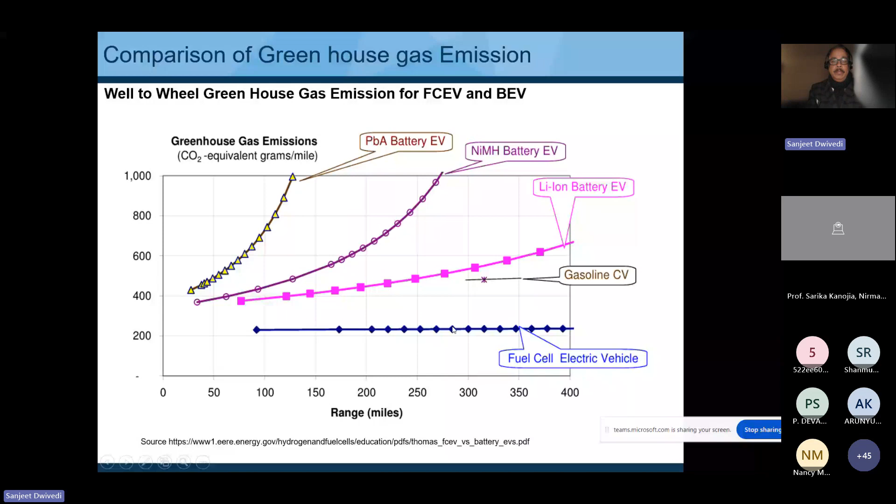I think my time is already over, so I will go through my conclusion. What needs to be done?

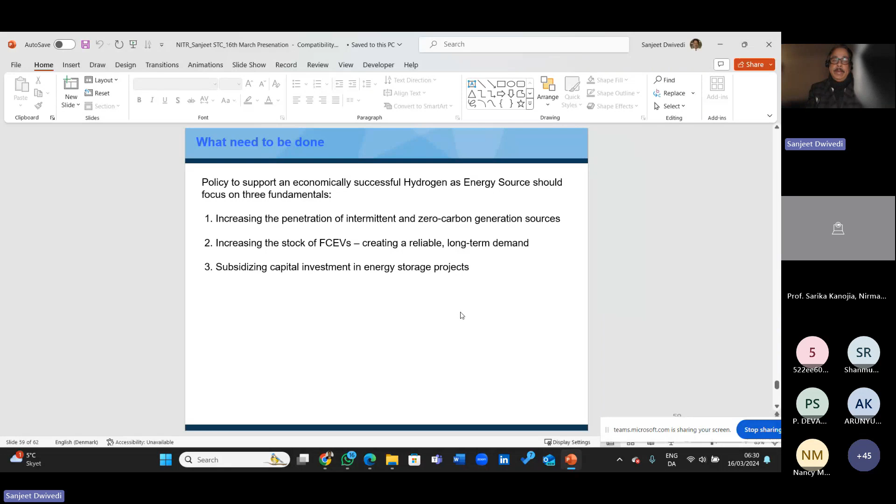Increasing the penetration of intermittent and zero carbon generation sources, increasing the stock of FCEVs, and subsidizing capital investment in energy storage projects, because there is a lot of technological gap. In order to meet this gap, capital investment and subsidy should be there.

Our conclusion is the fuel cell EV is superior to advanced lithium-ion battery full function EV on 6 major counts: weight is less, takes up less space, generates less greenhouse gases, costs less. When I talk about cost, I mean lifetime cost, because battery is limited to 10 year or 8 year battery life. If you look at the cost of BEV, it is around 50 to 60% battery cost, whereas in FCEV this hydrogen tank is not more than 2 to 5% cost.

You can replace it and use it again. Fuel cell is repairable, and it is a sustainable approach compared to battery. Higher well-to-wheel efficiency and takes less time to refuel, so the user has the same experience as a conventional gasoline-based car.

What are our key takeaways? The global mega trend shows that green energy shift is happening, and innovation in e-mobility through green hydrogen technologies is the necessity of today's world. Harnessing the advantage of the full value chain of green hydrogen is an essential component in the success journey of green energy transition.